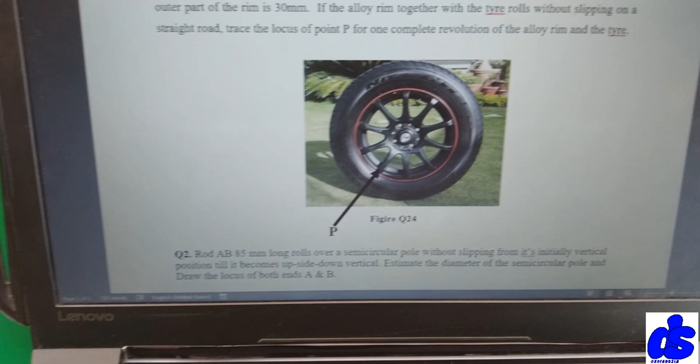Alright, so for question 2, this is the question. Rod AB, 85 millimeters long, rolls over a semicircular pole without slipping from its initial vertical position till it becomes upside down vertical. Estimate the diameter of the semicircular pole and draw the locus of both ends A and B. Right, this is the question, so let's start.

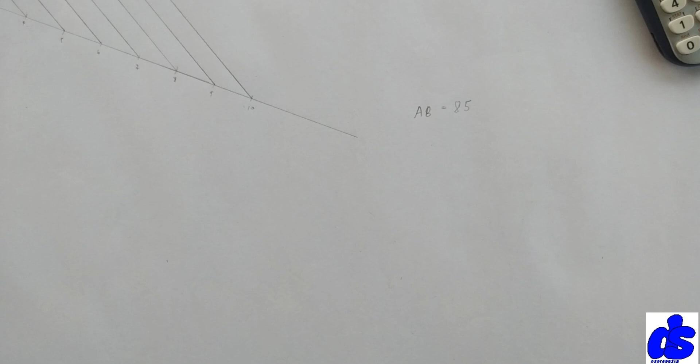Alright, so before we start drawing, let's do a few calculations. I've been given that AB is 85. Now the formula is AB must be greater than or equal to pi d over 2. Pi d over 2 because I'm drawing a semicircle. Now let's estimate the value of d.

So d must be less than or equal to 2 times 85 all over pi. So now d must be less than or equal to 54 millimeters. Now we have to choose a diameter that's a bit smaller. So in our case, I'm going to use a diameter of 50 millimeters. It all depends on you.

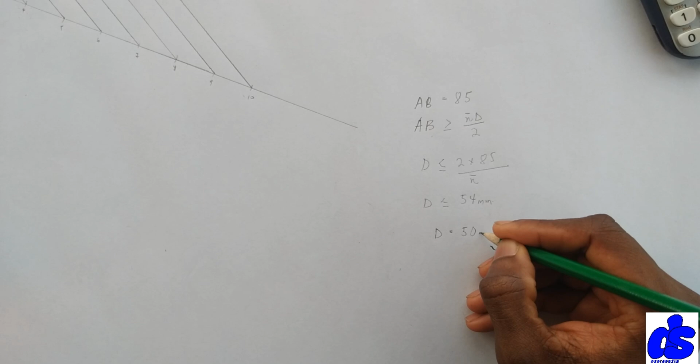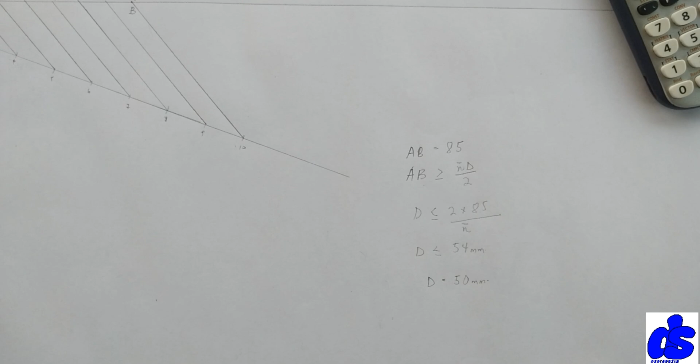So let's start drawing. Those who want to see, this is the calculation. Now to the actual drawing. First step you do is to draw your horizontal line. Then you draw the vertical rod. Now the vertical rod has a distance of 85. So let's measure 85.

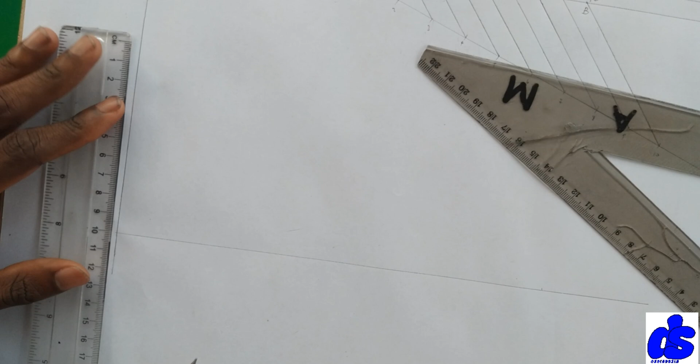So here's my A and here's my point B. And the diameter of the semicircle, we are using 50. So the radius is 25. I'm going to pick 25. I'll stand at A and describe an arc. Now let me name this point O. I'll stand at O and draw my semicircle.

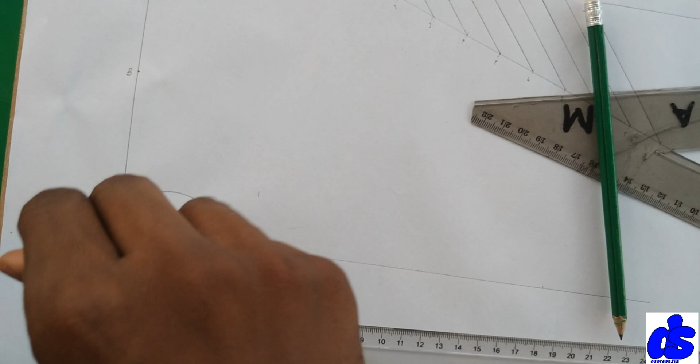Right, I'm going to divide this semicircle into 6 parts. So let me draw the vertical line first. That's my vertical line. So then, with this radius, I'll stand here and describe an arc. Stand here and describe an arc. Stand here and describe an arc. And describe an arc. I'm going to draw lines from the point of intersection to the midpoint. Yes.

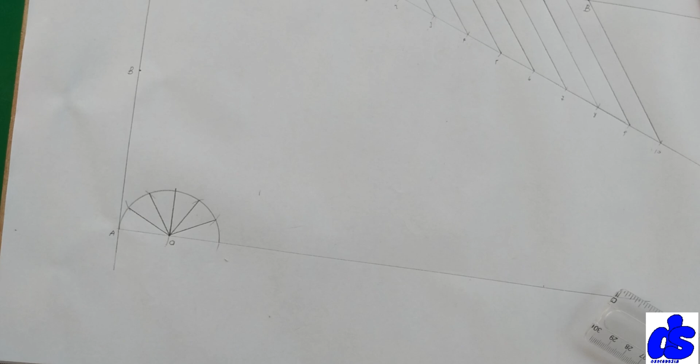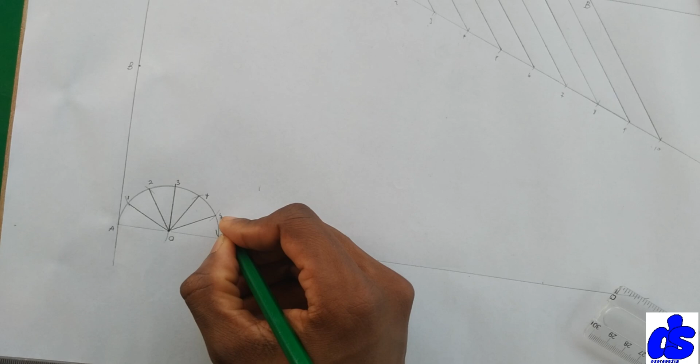Right, so now let's number the points. We have 1, 2, 3, 4, 5, 6. Now let's pick from A to 1, or you can pick from 1 to 2. It's the same thing. Step at A, describe an arc. Step there, describe an arc. You're doing that 6 times. 1, 2, 3, 4, 5, 6. So let me number here too. 1, 2, 3, 4, 5, 6.

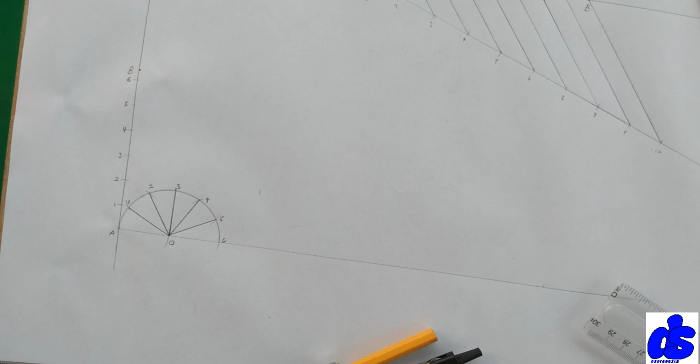Now I'm going to draw tangents to all the points. So we stand here. This one is bigger. I need to extend this line a bit. So you use a 45 degrees set square to get the tangent line. Then you extend with your ruler. I'm going to extend the line to the ruler.

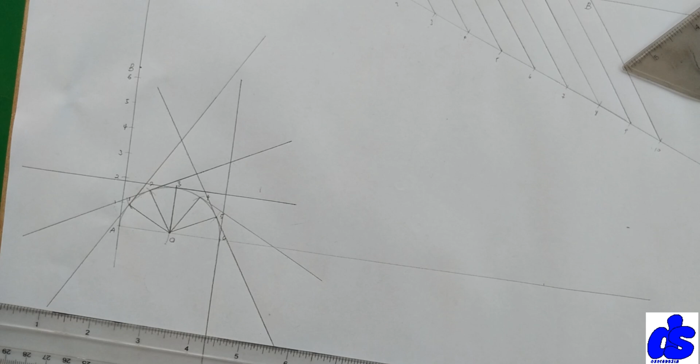Alright, so let's start work. You stand at 1, open to A. Stand at 1, inscribe an arc. Stand at 1, open to B. Stand at 1, inscribe an arc. Let's do that. So stand at 1, open to A. Stand at 1 and inscribe an arc. Stand at 1, open to B. Stand at 1 and inscribe an arc.

Let's move on to 2. Stand at 2, open to A. Stand at 2, inscribe an arc. Stand at 2, open to B. Stand at 2 and inscribe an arc. Stand at 3, open to A. Stand at 3 and inscribe an arc. Stand at 3, open to B. Stand at 3 and inscribe an arc. So I'm going to repeat it for the rest of the areas.

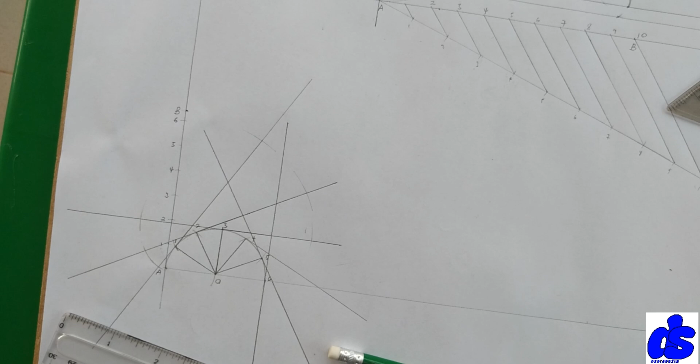As I'm done getting the points, I'm going to number them. So here's A1, A2, A3, A4, A5, A6. Where's B? One starts from here. So here's B1, B2, B3, B4, B5, and B6. We are going to join all the A's and all the B's with a free hand.

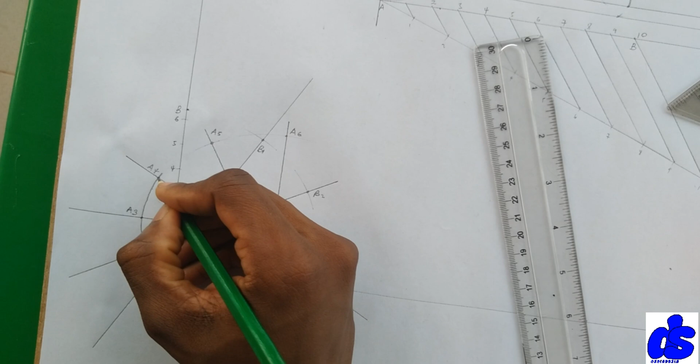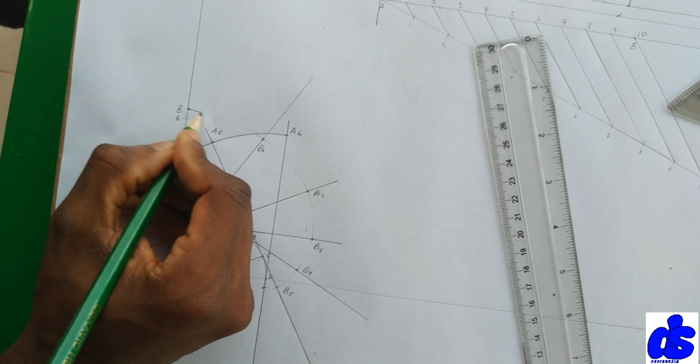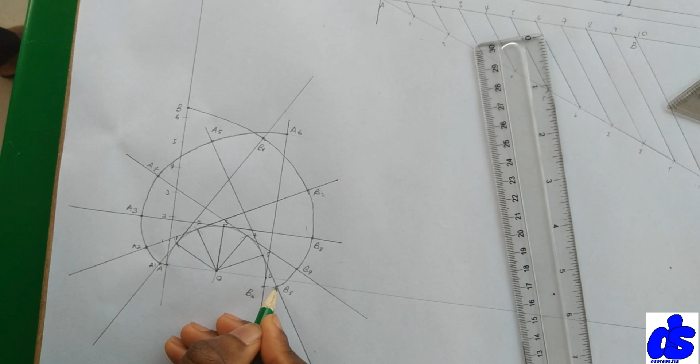That's for the A. Let's do the same thing too for the B. Yes. And that's it for the B too. So that's the solution to question 2.